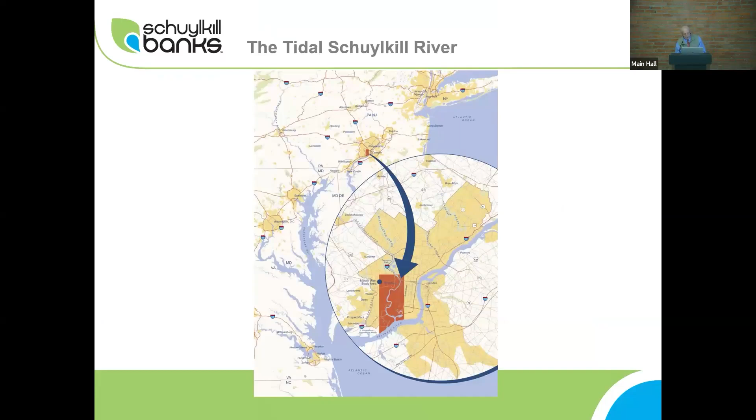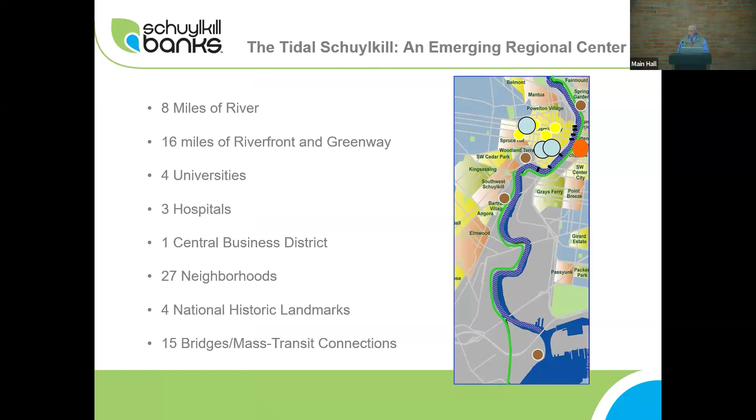Schuylkill Banks is the branding that we've given to the Schuylkill River Trail in the last 8 miles of the river, the tidal part of the Schuylkill River. Some people don't know the Schuylkill River is tidal. There's a 5 or 6 foot variation in tide, and that makes everything we do out there on the river more complicated. This is what the river looked like in 1924.

This thing is moving by itself now, so... I think we have it on a timer. Will you get it back to where I see the next slide coming, the previous slide? Yeah.

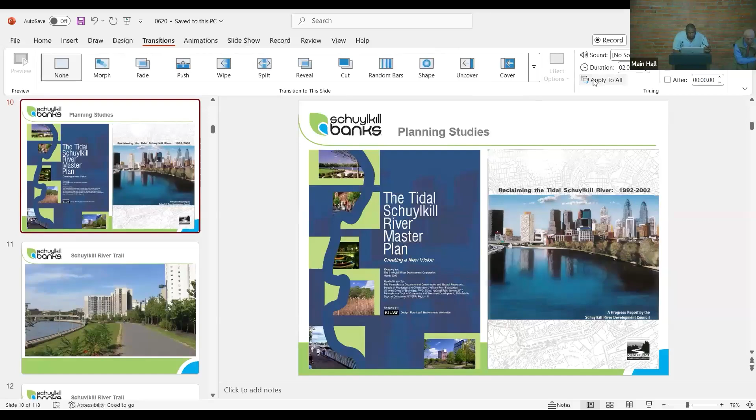Well, the first thing is 90 years passed. So a lot of things can happen in 90 years. But also, the concept of a river trail goes back ages. I've heard at least 10 different stories of where it first started, and they're all probably partly true, but they go back decades and decades.

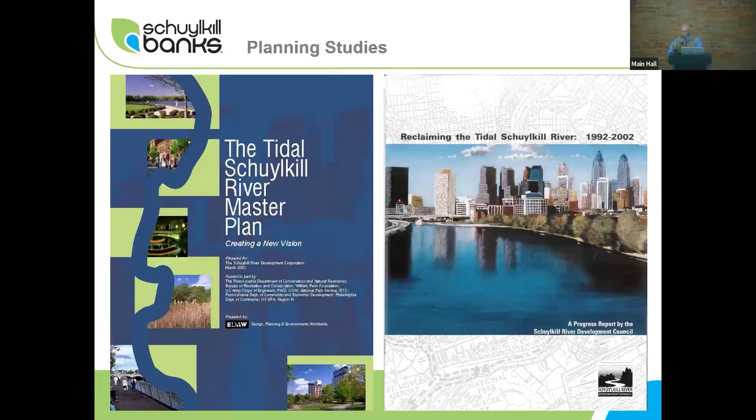At that time, around that time, there were at least 2, maybe more, planning studies initiated. The one on the right there was issued by the Schuylkill River Development Council. The one on the left there was issued in 2003 by the Schuylkill River Development Corporation. So the only thing that changed when they went from the community-based organization to the thing - it's the same organization - they just slightly modified the name, but it's still SRDC.

People use it in the rain. People use it in the snow.

I imagine a lot of people in this group will remember the whole issue of the railroad. When the trail was built, the railroad came and actually sued the city, trying to close off the entrance to the trail at Locust Street and Race Street. And the city, to their credit, said, the heck, we just built a trail. We're not closing it off. It was in federal court.

It was Judge Kaufman. And luckily, the judge, on the very first day, he said, I don't really get what you're saying, railroad. You're bringing this court case, but I drive into work every day and I go over a couple of railroad grade crossings. It's in my car, it's not as unsafe as you're thinking it is. So the railroad got a little nervous that they were going to lose the lawsuit that they had brought. So a compromise was reached.

The 2 crossings, Race and Locust Street, had the gates that you all know there that close automatically. But also as part of that agreement, they would build a pedestrian bridge. Now you would think that would be an easy sell. That was not an easy sell. In fact, we got the job somehow of moving that along. The city was smarter than us there, I guess. And in fact, we got sued by the neighbors to stop this. So in any event, it finally got done.

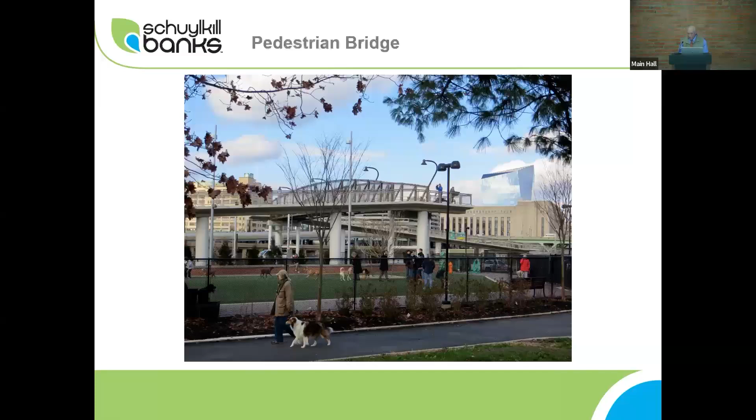And I think everybody is pretty happy with that. The dog park is way better than it was before. The gardens were kept in place. And the bowl area, which some people thought was in jeopardy, hasn't changed at all. If you go downriver further, there's the Schuylkill Banks Boardwalk.

This was done out of necessity. There wasn't enough room on land to build a trail, so at some point somebody said, why don't you build a structure out over the river? You could call it a boardwalk. We were told by knowledgeable people, don't even think about it, you could never afford it and you could never get permitting for it. Last October was the 10th anniversary of the boardwalk, so obviously both those things were not correct.

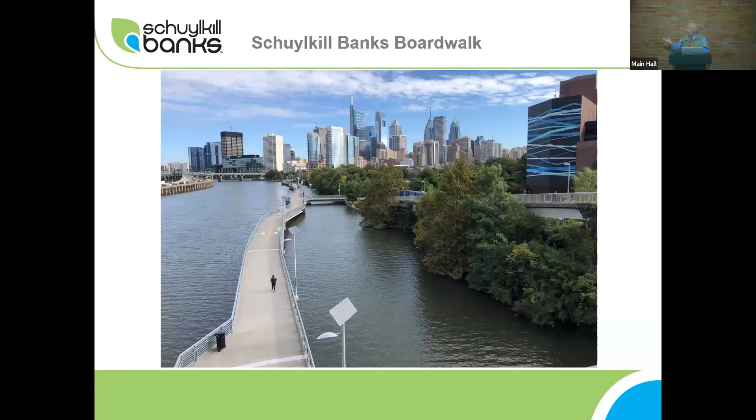This is a picture of the boardwalk from the South Street Bridge. This South Street photo of Center City is now the go-to photograph of the city. It used to be Belmont Plateau, but there's such a great view of the skyline here that it's just great, and lucky for us, the boardwalk just happens to be right in the middle of it.

If you turn around there and go south, there's a section down there called South Street to Christian Street. This is a section of trail that's really nice, it's planted differently, more of a meadow mix. Up until recently, two months ago, we didn't get a huge amount of traffic because it was a dead end right at Christian Street, but it's a very nice section of trail.

I'm going to jump over a section here.

I'm going to go down to the other side of 34th Street, where there's a section of trail called Grays Ferry Crescent. Grays Ferry, because that's the neighborhood you're in. Crescent, because there's a big curve in the river to the left.

This is a really beautiful trail, but it's a neighborhood park. It doesn't go anywhere to the north, and it wasn't connected very well to the south. So the neighbors loved it, but it's supposed to be a trail, it's supposed to be for everybody.

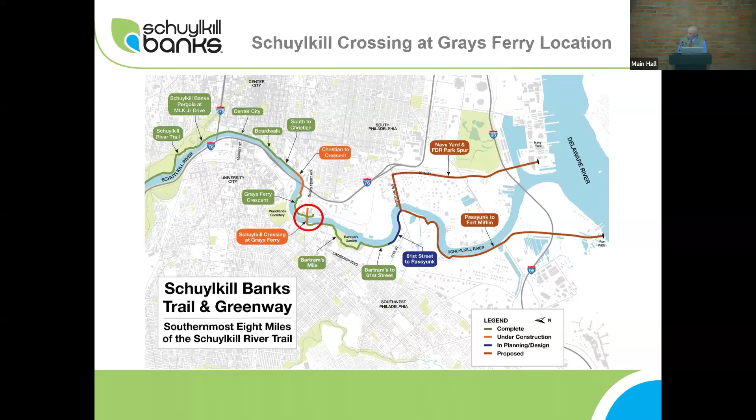With that, we always wanted to cross over the river, because we knew we could not continue down the east side of the river. While this was going on, Sunoco was still operating a refinery down there, and then Philadelphia Energy Solutions took that over. We knew we could never get a trail through a refinery—oil and water really don't mix. So we looked at other ways of doing it, and we wanted to cross around at Grays Ferry Avenue.

If you look at Grays Ferry Avenue there, the first thought was, well, we use the Grays Ferry Avenue Bridge to cross over the river. But if you know that bridge, it's very, very high up in the air. It's not pedestrian friendly, it's certainly not bicycle friendly.

So the new idea, not so new anymore, was to take this old abandoned railroad swing bridge and use it for the trail crossing. Trains stopped running on this sometime in the 1980s, we're not sure when, but here's a picture of the rails, two sets of rails, and you can see a fairly good-sized tree growing up from between them. So obviously it was a long time ago.

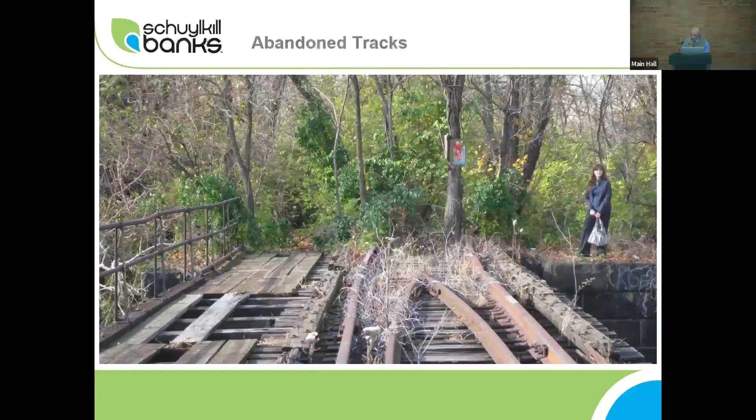It isn't done yet. The contractor walked off the job, there was a dispute with the city, and he was off the job for a long time. But before he left, he got rid of the old truss—the idea was it's too heavy, it's too old, and we're going to put a newer, lighter truss in there, and keep it as a movable bridge.

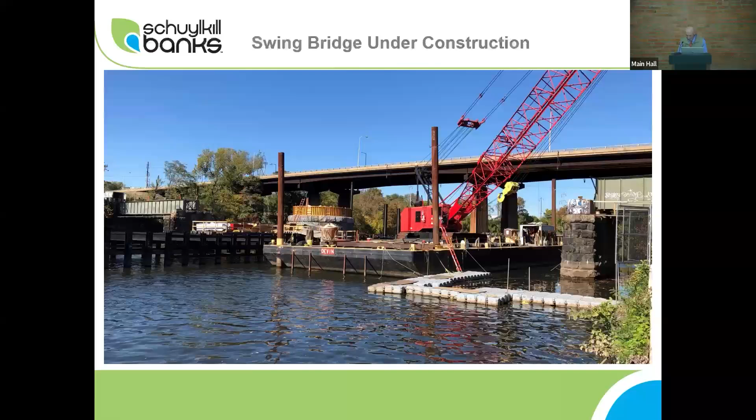So here's what it looked like before the contractor walked off the job, and the city's handling this.

We gave them a really hard thing to deal with, but they've done a wonderful job.

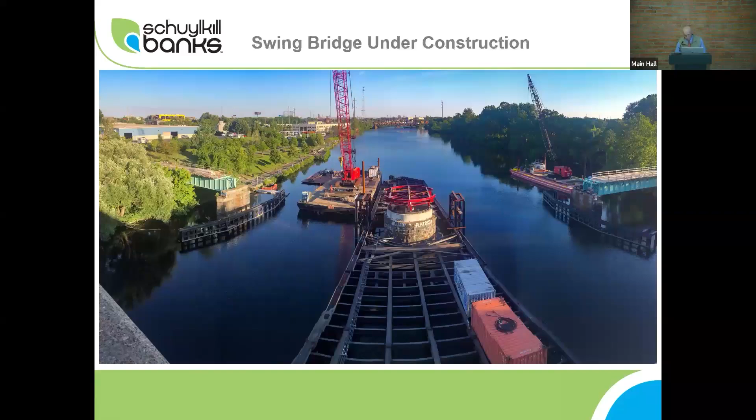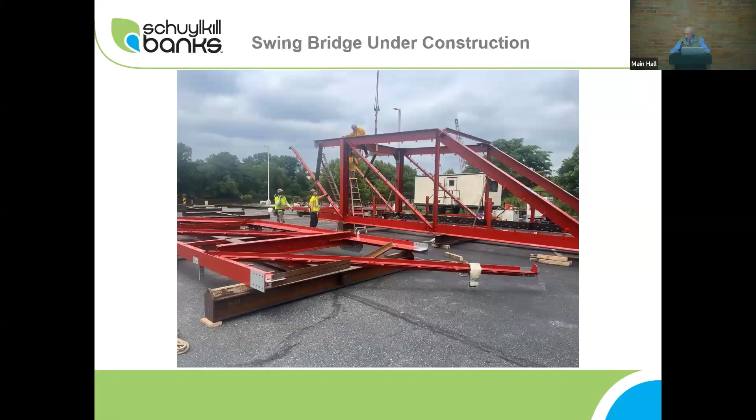The good news is steel started to arrive on site within the last two weeks. Iron workers are out there putting that steel together, and I'm told that next week these sections here will be put on a barge and taken out to the pedestal and erected. If that happens, and if everything else goes well, this will be open by the end of the calendar year. If everything goes well, it will be the first time.

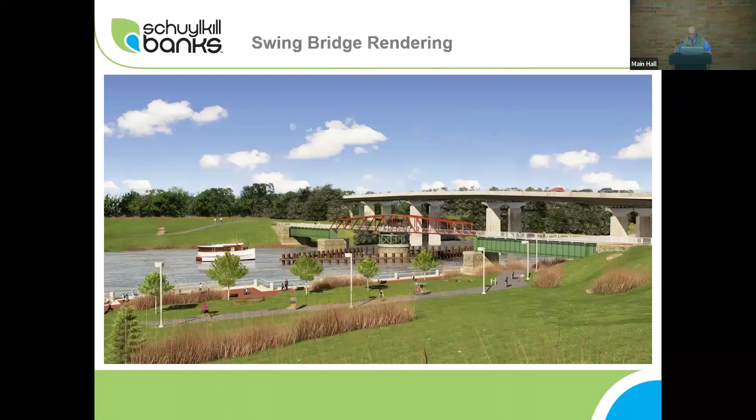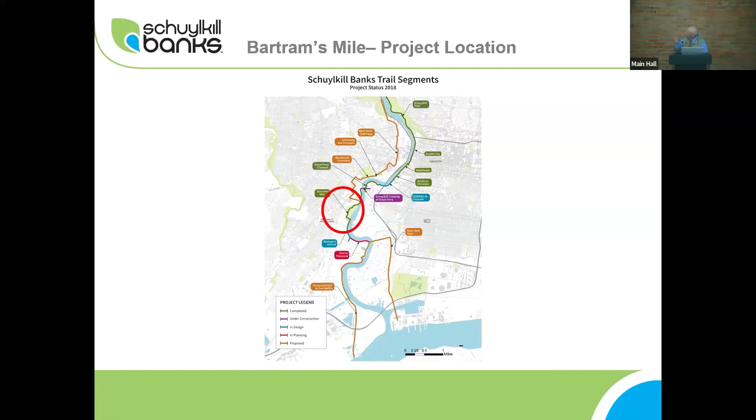Once you cross over the river there, you come to a section of the trail called Bartram's Mile. It's about a mile long, and it goes through Bartram's Garden. This opened in 2017. It's a neighborhood park. It's not connected yet to the north, and not connected very good to the south, but it's a beautiful section of trail. Here, this is what it looks like.

We're trying. Once you get that swing bridge connected, this trail gets a lot more traffic on it.

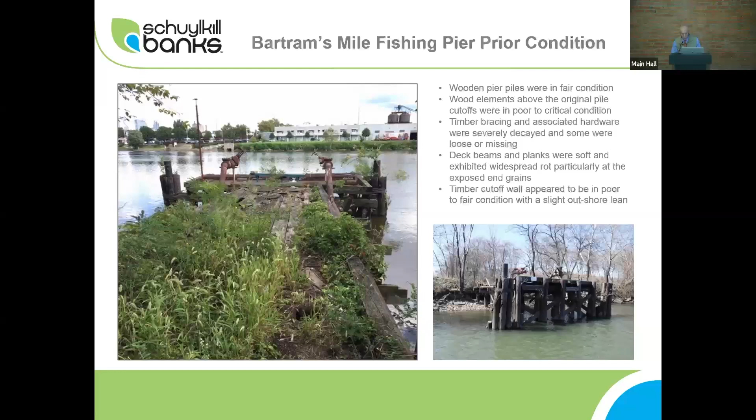Now, if you were to walk down that trail, you'd walk past a bunch of old derelict piers, mostly petroleum piers. They're out in the river, rotting, not being used. Fishermen are going out there on some of them, taking their life in their hands. We've taken a couple of those piers and turned them into a fishing pier. We thought on the one you just saw that we could use certain elements of the foundation in there, but when we got in there, we almost couldn't use anything. It was almost completely rebuilt.

But those piers have something very important: they have a permit. And for some reason, which I do not understand, it is immensely easier to revise or update a permit than it is to come in with a new one. So that permit is really valuable. It establishes the fact that there's something there and you're fixing it. It sort of makes it a maintenance project in a way, although this was way more than maintenance.

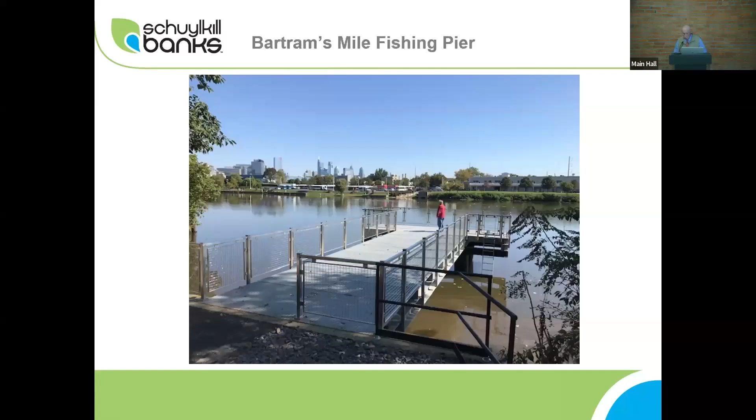So if you go down to the end of the Bartram's Mile, you'd come at one time to 56th Street, this wonderful pergola and plaza with beautiful views of the city. For a while that's where the trail ended, because we're building this trail as land and money become available. So it ended at 56th Street for four years, until we got some money to do something different.

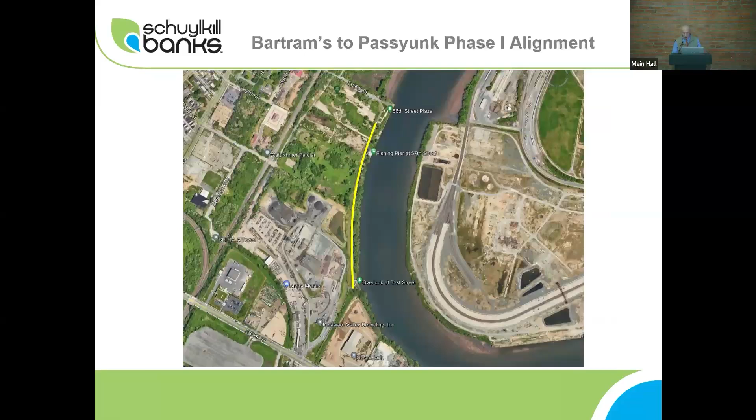That extended it further south. So this is what it looks like going further south. There's a section of trail right along the river. This is old abandoned industrial land, but it wasn't too bad. In fact, at the northern end of this is what it looked like, and you don't need a great imagination to see a trail being built right through there, with the river right on to the right.

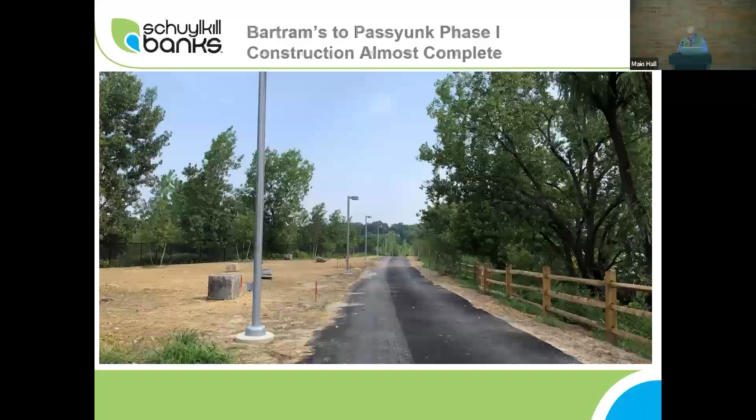When you got further down, it did get a little more gnarly. There was a lot of invasive plants, and a lot of what some people call Philadelphia fill, old rubble buried down there from demolition sites, but still pretty good. So that trail got under construction. Here it is, almost a picture of it almost done.

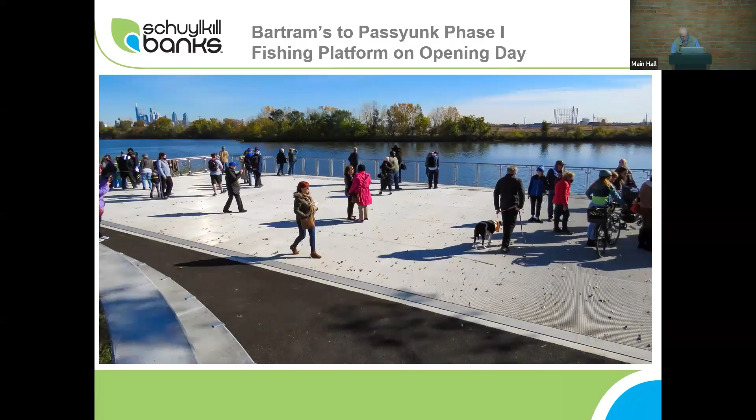Here's a picture of a fishing platform we built there, a million dollars. This fishing is really huge in this area. Now there's a lot of people out there because it's opening day, and just to the right there we're giving out free donuts, so a lot of people there. But if you were to walk south from there, you'd just follow the terrain.

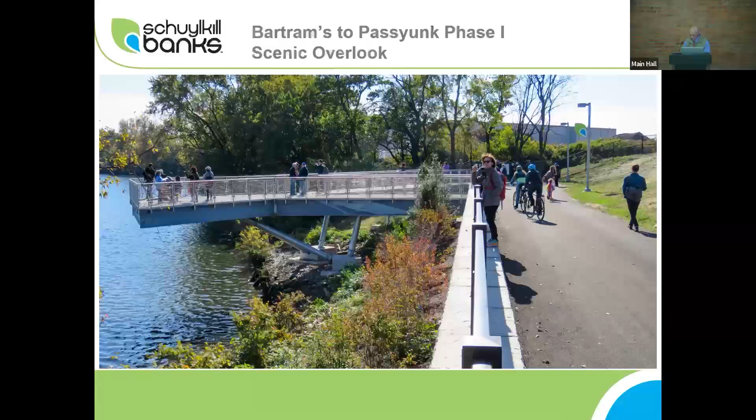It's rolling terrain, and when you get to the end there, you come to this wonderful overlook that we were able to build. Right beyond that, the trail ends there today. This overlook has amazing views of the city skyline, and by the way, almost the whole trail has great views of the skyline. So that was exciting to get that done.

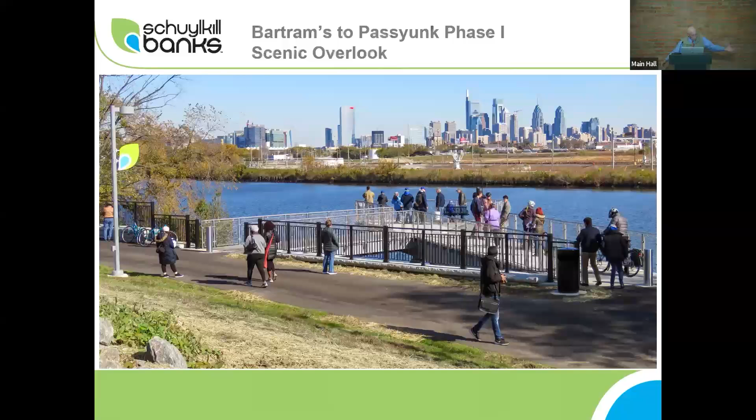But again, it's a neighborhood park. It's not connected to the south, and it's not well connected to the north. So now let's jump back to the section that we skipped over, because that's the star of the show, I think.

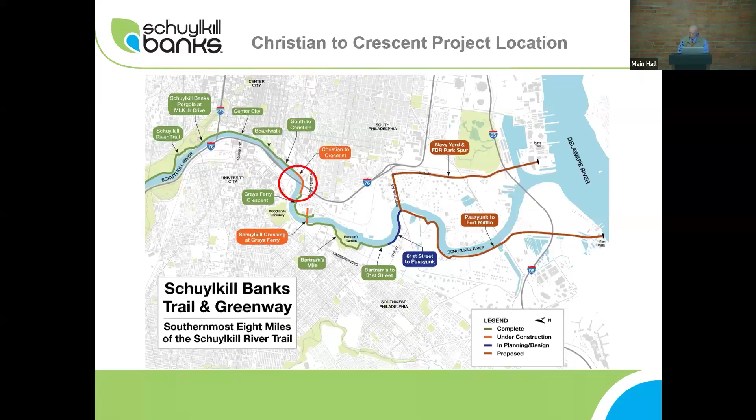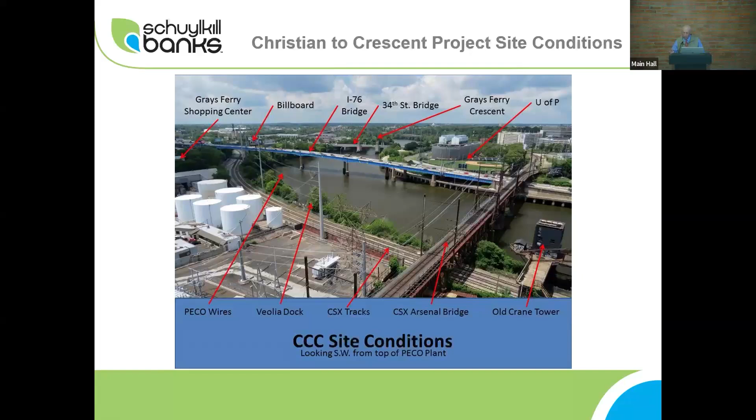If you don't know where this is, and you probably don't because you can't really see this from anywhere, it's right in back of the shopping center on Grays Ferry Avenue, or directly across the river from Penn's baseball field. So again, a lot of complications. How are we going to get a trail through here? We really didn't want to go out over the river if we didn't have to, but maybe we'd have to.

So the question was, okay, we have a lot of structure, but what will that structure look like? We said, well, we know we have the boardwalk — we built the boardwalk, and that's just pre-stressed concrete beams on caissons. Those caissons go down into the riverbed, and they actually go down into the rock. We knew we could build that, so we looked at that.

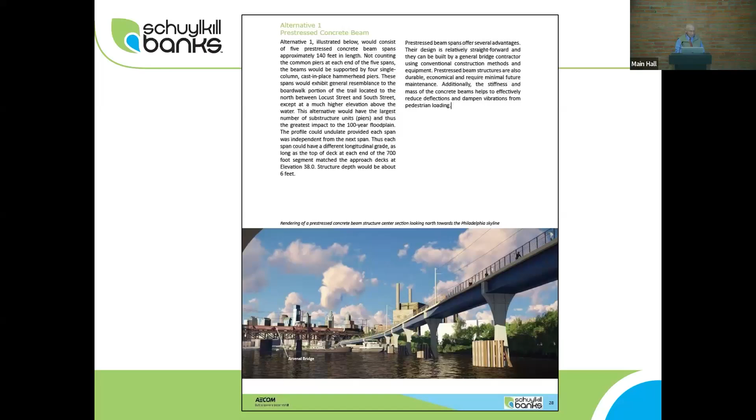But we thought, you know, this thing is high up in the air now because they had to get up over that pier, right? And we thought, well, if we do that, you're going to have these piers every 140 feet, big concrete piers — it's going to look like a concrete forest of piers. It's just not going to look good. It'll work, but it isn't going to look good. Also, it's going to be expensive because these piers are all built on drilled shafts or caissons.

But these would be — because they would be much higher, or maybe they would be — so we looked at a steel girder. That lets you do a longer span, and therefore you have fewer columns, but you still had a lot of columns. So we said, we're not crazy about that either.

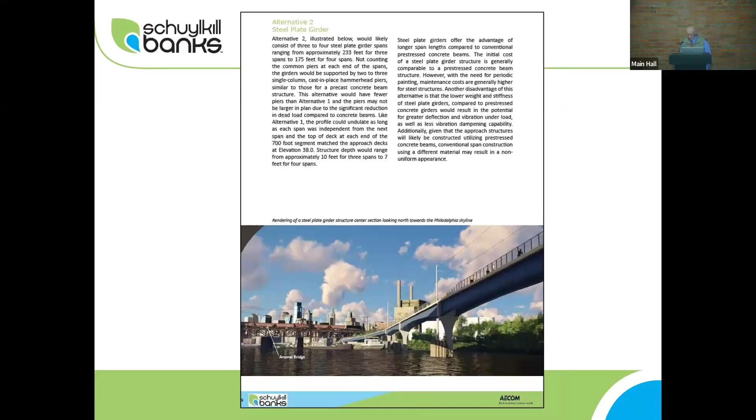And for a bunch of reasons, that got deferred. We're actually starting to relook at that again. And we thought, is there something we can do on this flat part of the land, of the structure here, that would make sense? And we thought, well, how do you figure that out?

So when we looked at those things, we looked at cost, we looked at appearances, we looked at how many penetrations they were going to make into the water, because the more penetrations you make into the water, the more difficult the permitting becomes. Also, it's expensive. So the suspension bridge just sort of eliminated itself. It's not long enough for a suspension bridge. But the other three would work.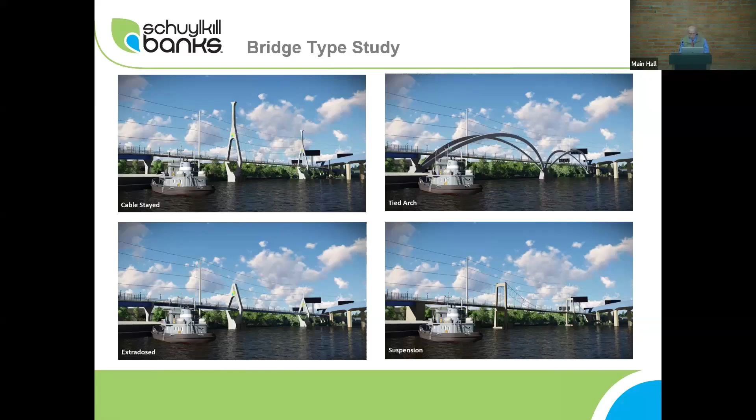But when the committee that was looking at that looked at that, nobody really liked the tied arch. I don't know why, they didn't like the tied arch. But they did like the cable stayed bridge, and they did like the extradosed bridge. But there's a lot of different ways you can configure a cable stayed bridge. So we need another study.

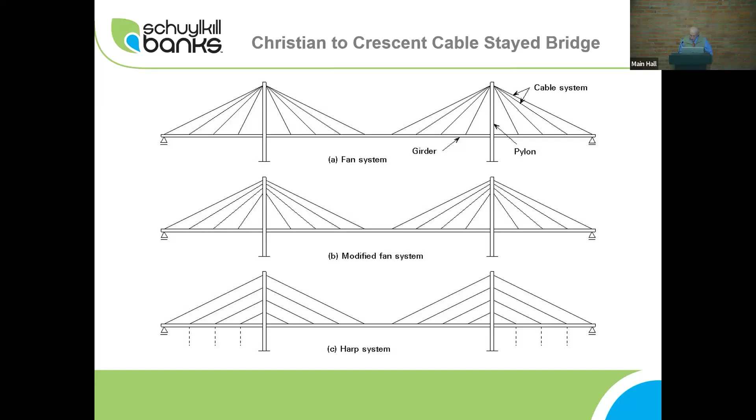You can also have these cables come down in two planes where they attach to the outside of the deck, or you can have them come down in a center plane where they connect in the middle of the deck. Now, when you do that, you don't have as good rigidity as you do with the double plane. So in order to do that, you've got to beef up the deck, make it a little beefier so it adds to that stability.

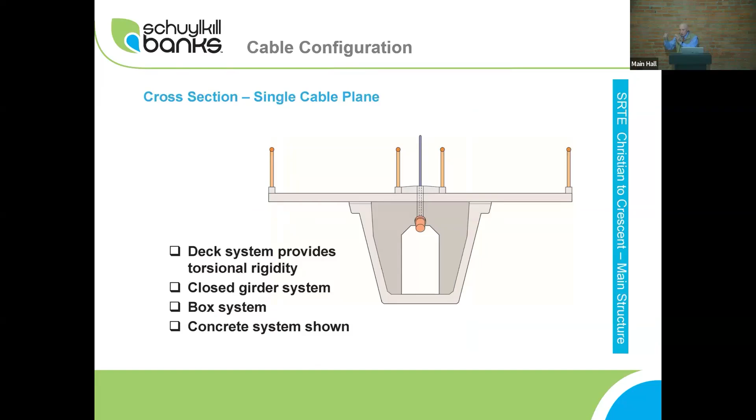When you do the single plane, you see where the cable's coming down there in the middle, sort of bluish. That sort of automatically defines 2 lanes of travel. You have a southbound lane and a northbound lane, or a lane for bicycles and a lane for pedestrians, but it automatically separates those 2 things. People like that, so we ended up picking that one.

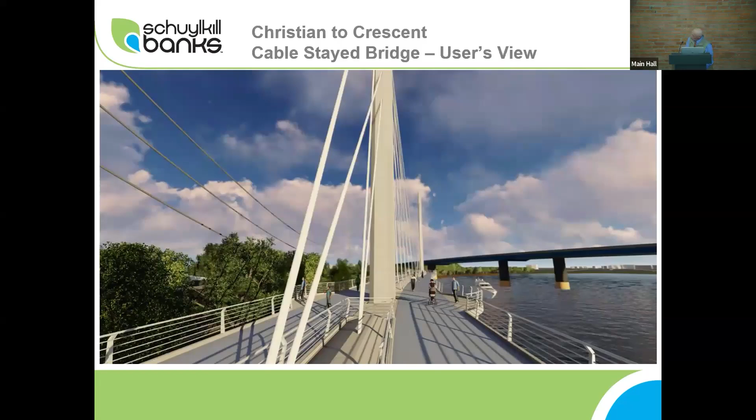And then we took that into a little more refined design. This is what the rendering looked like, and this is how it would look in use. It also could be architecturally lit at night, with accent lighting. So we liked that, and it went out to bid.

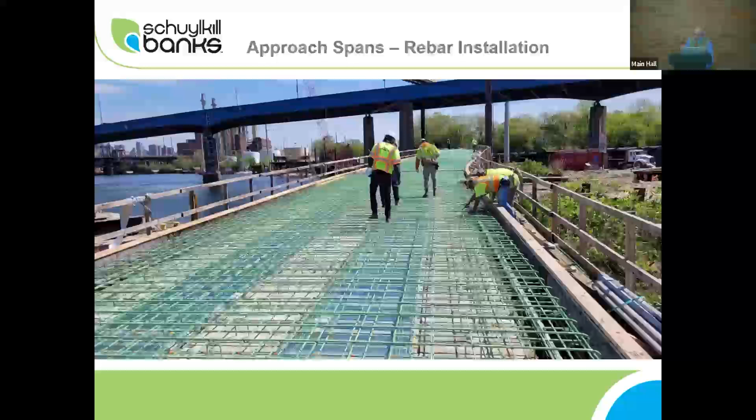This is the approach work. It's just a single caisson, pier cap, pre-stressed concrete beams. This is the reinforcing steel, and this is epoxy coated steel.

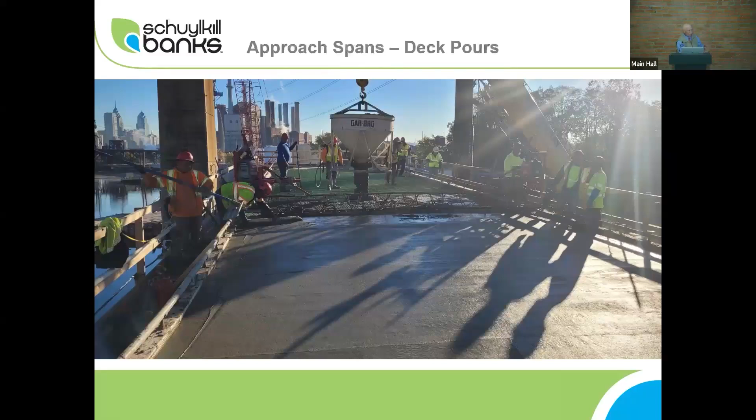All of the concrete had to be brought on barges on these hoppers. They would take a truck downriver, fill up 2 of these hoppers, and then move as fast as they could because they didn't want it to set up in the hopper, and then dump the thing. It was really hard to do, and it took a lot of people. Everybody needed for this had to be out on site.

This is how that approach ended up. And I want to point out the very fancy railings here. This is stainless steel 316.

When one of the estimators was looking at that at the beginning, he said, ooh, the good stuff. We're doing that because we're in a marine environment, but the city's going to own the trail. And the city said to us, please don't build us something so fancy that we can never maintain it, because you're not doing us any favors.

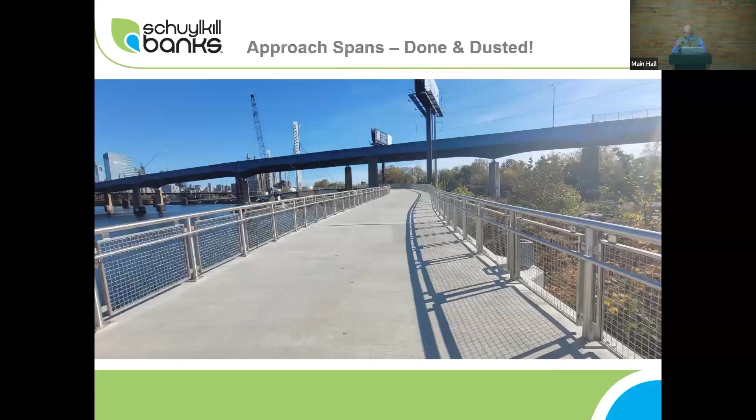And we said, look, we've got to be out over the river, we've got to have certain kinds of things, but we'll do everything possible to make the maintenance of this as good as possible. If we can get everything to last 75 years, would you be good? And everybody said, yeah, that would be good.

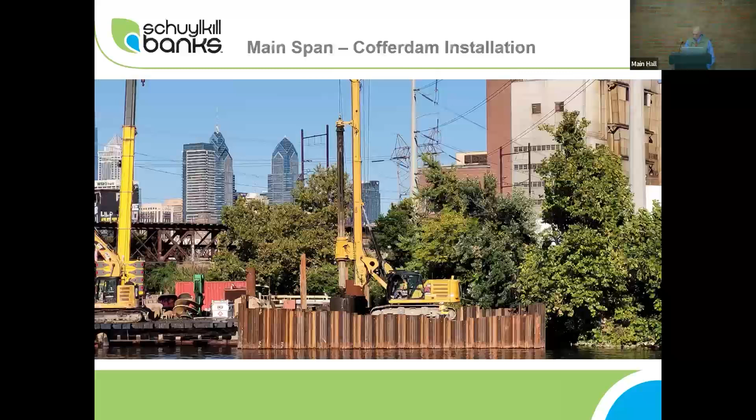So here's the construction starting on the pylons. These are the caissons going on, a cofferdam being put around them to pump out all the water. Here's the caissons under construction. There's 9 of them for each tower. Here's the reinforcing steel, look at how much steel there is. You wonder how they can get the concrete in there, don't you?

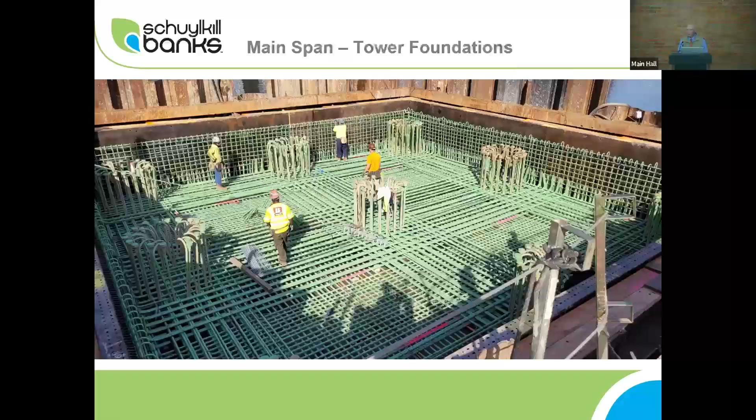You look around at how many people are working on this thing. They're finishing this up here. Here's the tower starting to go up, and here's the tower getting further up.

The picture on the right, if you look at that, there's some piping in here. This is plastic piping that they can pump either hot water or cold water through. So if it's summertime and you want to keep the heat of hydration down, you can pump cold water in there. And if you're doing cold weather concreting, you could put hot water in there, and it changes the temperature.

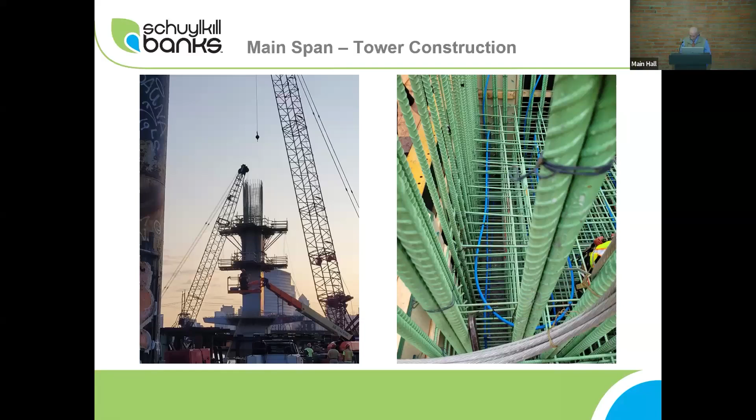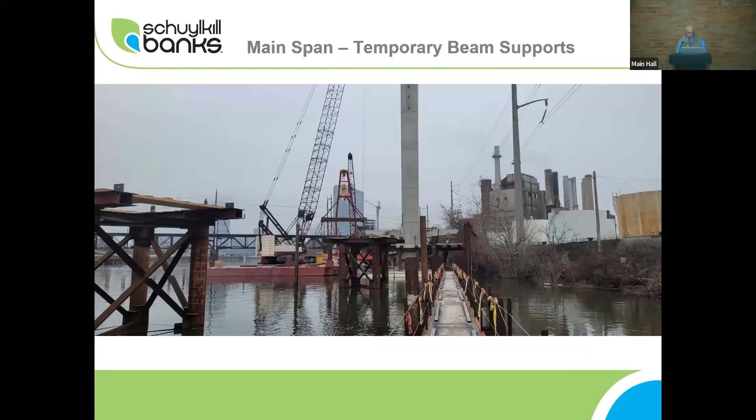So, kind of complicated. Here's the attachments going up, the cable attachments. When you bring these beams in, you've got to set them somewhere, and you don't attach the cables right away. So you had to put these temporary structures in there, which is what that rusty colored steel is, as a support for these beams.

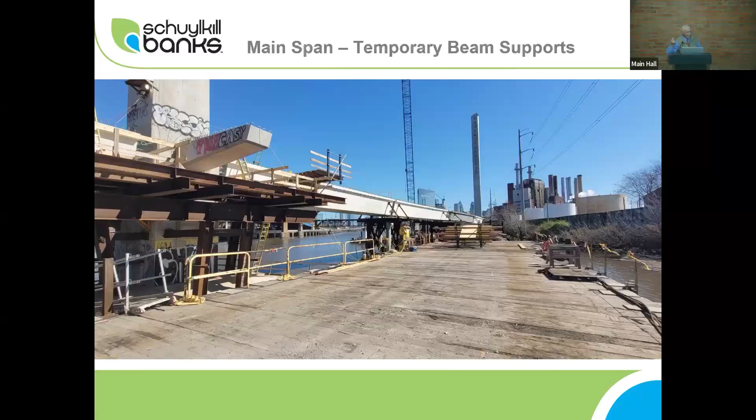This photo is a little bit out of sequence because the beams were already up, but I wanted to show you that the contractor built himself this boardwalk so that everything he did didn't have to be done from the water. He was able to get heavy equipment out on there. I think this idea is what got him the job.

So here come the beams. These are big, heavy beams, 135 tons. They were manufactured up in a plant in Albany. They were brought down the Hudson River, down along the Jersey coast, up Delaware Bay, Delaware River, and the Schuylkill River.

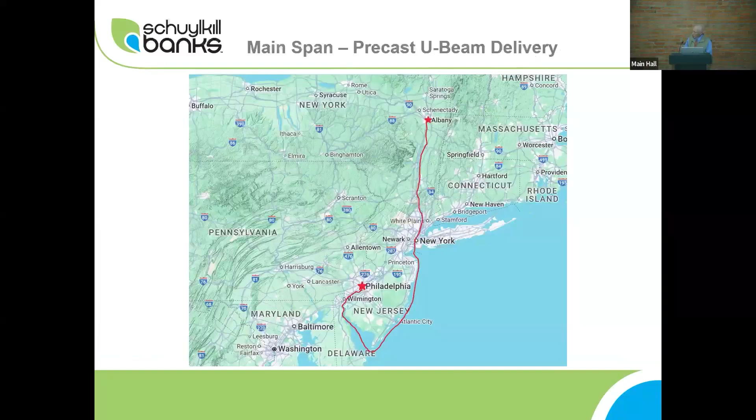We were told you got to be really careful, these are very, very heavy beams. If you have a crane on a barge and they make a mistake, it could fall over. The crane could be in the river, the beam could be in the river. You got yourself a mess.

People tried to talk us into going to steel instead of concrete. That would have been lighter. But we said no, we're trying to make it less maintenance for the city, and concrete is less maintenance than steel.

We were getting some comments from a peer review consultant whose job was to look at what you got and make comments. He was saying, I think you're making a mistake. There's only 5 cranes in the country that can do this, and they're all over the country, you'll never get one. So we said, well, we're doing it.

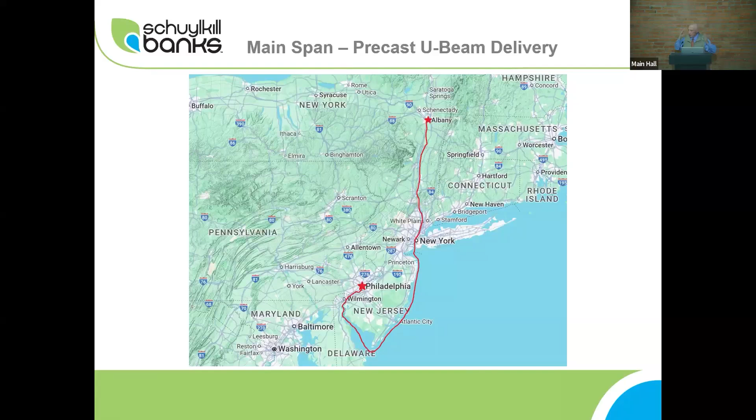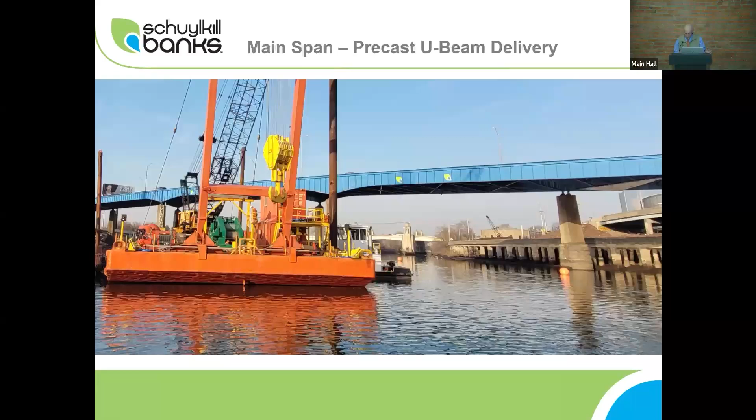We said, I think you sent the wrong piece of equipment here. Well, it wasn't the wrong piece of equipment, it was exactly the right piece of equipment. It picked these things up, and we watched it go over there and plop it on. The first beam was 27 minutes, which is pretty darn fast, and he got faster as he went on. As he did them, he got more comfortable with doing it.

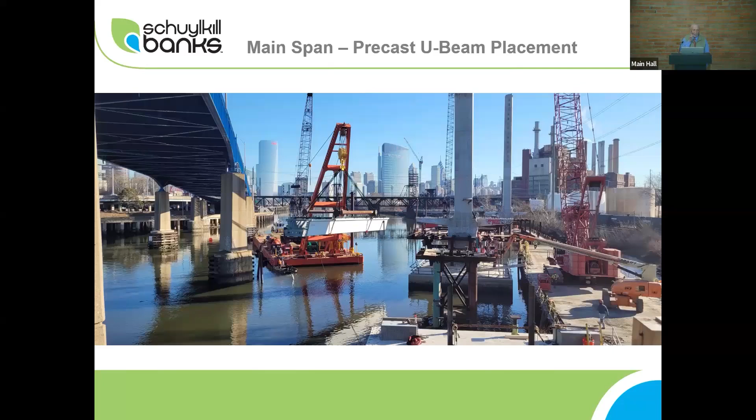So again, the contractor went and found the right piece of equipment. He had to go to the Bahamas to get it. Probably cost him a fortune, but he had it there. So here it is, lifting these things in.

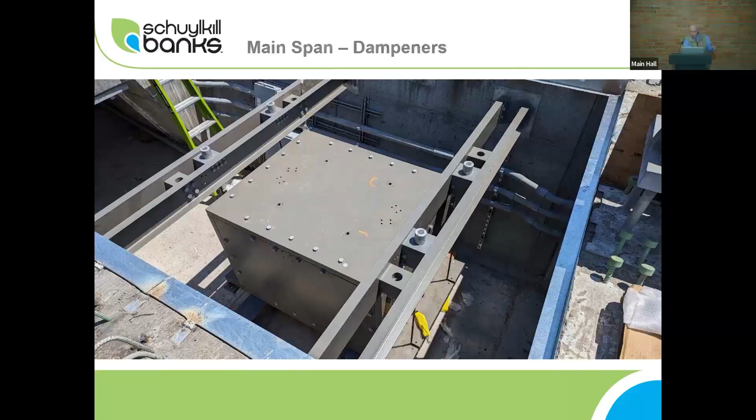When you have these kind of structures, you can get some movement in there. That's okay, that's normal. But we decided to spend some extra money and put these dampers in there. These dampers sort of counteract any movement — if the structure wants to swing to the left, somehow this pushes it back to the right.

So we actually said, look, how about we bid it as an alternate? We'll design it this way, but the contractor can bid it using epoxy. PennDOT said that's fine, because they were absolutely sure everybody would bid it as epoxy coated, which would be less money. There were 8 bidders, 7 bid epoxy, but the low bidder bid stainless steel. And that's the only bid that counts, so we've got the stainless steel thing there.

Oh, I'm stuck again, guys. Eli, I don't know what you did last time, but show me now. I think you had to right click and then pop that up. Okay.

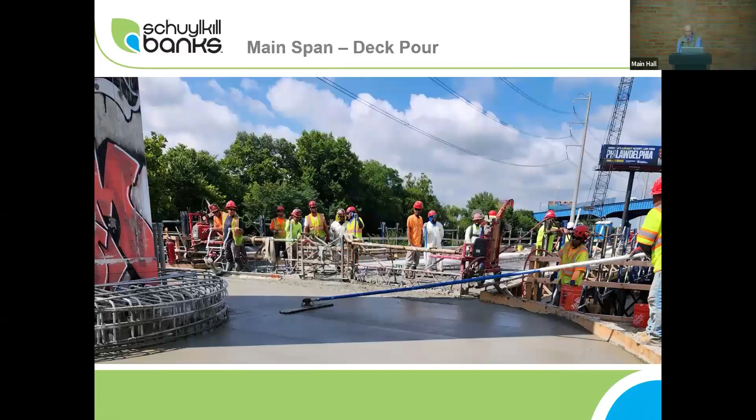So here they are finishing some concrete. Again, you see how many people are out there — they're all brought out by barge. They have everybody they're going to need for this operation has to be out there. They can't say, hey, where's Louis? Louis on land — Louis has got to be out on the site.

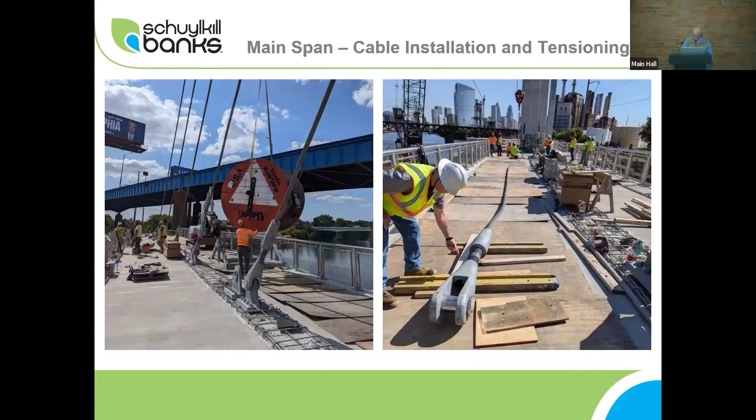Here they are starting to put the cables up. They attach the cables at the bottom, they attach the cables at the top, and then they tension those cables. As they tension them, it lifts the structure up about an inch off of those temporary supports, which are on jacks, and then they can pull those supports out.

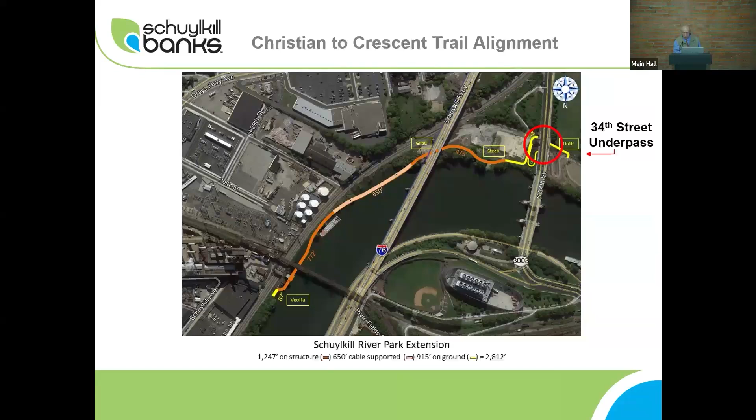This is what it looked like underneath. PennDOT had a plan to remove this bridge, fill it in, and get rid of it to make it just a regular roadway section.

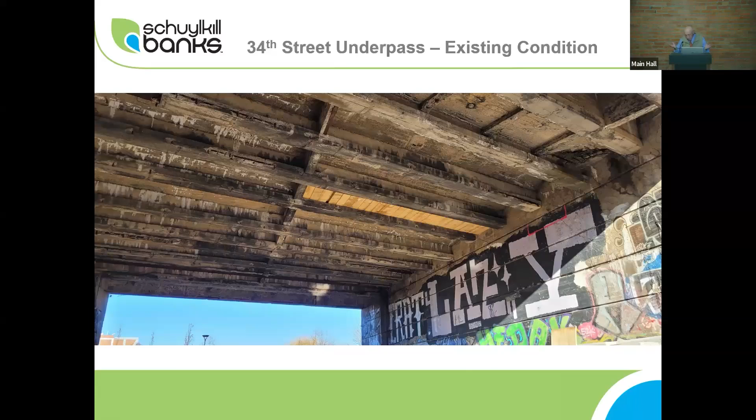We went to PennDOT. I had to cry in public, but I asked them if they would please keep it open. PennDOT said, look, we can do better than keeping it open for you. We can actually reconstruct it.

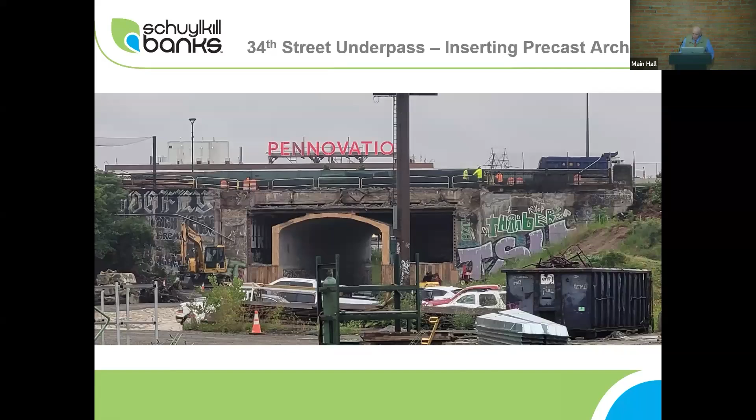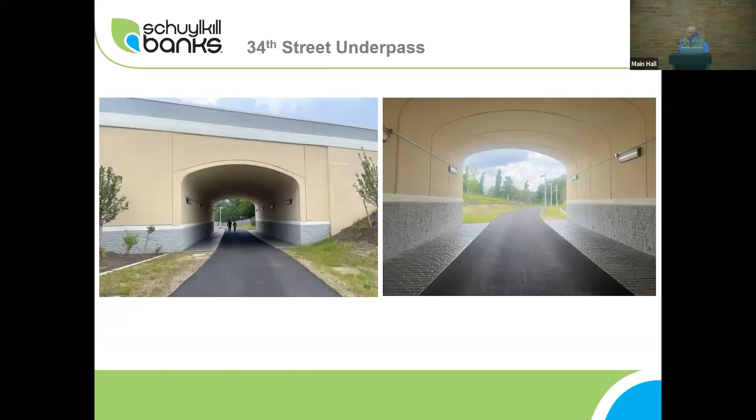So as part of the big project, but at PennDOT's cost, they took these arches you see there, two sections, and slid one in from each side. Once they did that, they demolished the bridge up top and around it. The graffiti people found out where this was happening, by the way. But this is what this thing looks like today, looking in the two directions. That was super, super fortunate and super, super great by PennDOT.

Here's a rendering of what this bridge looks like, but you know what? We don't need to show you a rendering anymore because we can show you the actual photographs. So as all of you probably know, yeah.

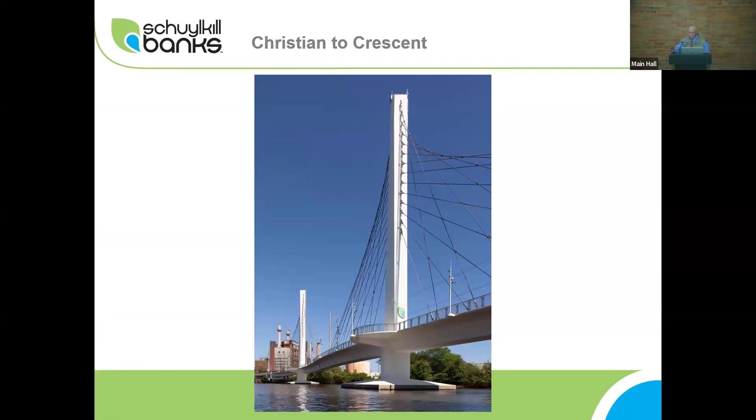May 17th, great day. We have some great photographs. What we always do is have a lot of donors to our organization, so a couple of days before the opening, we give our donors a chance to come and walk on the bridge, sort of get a sneak peek.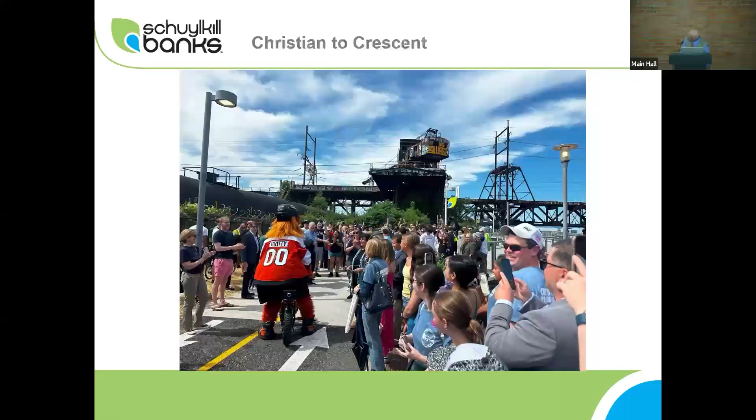This is opening day, the ribbon cutting. We get out there and realize our insurance company said, look, you're doing something dangerous, you've got these big scissors there, we really don't want you to do this. We want you to have somebody, a safety officer, overseeing the thing. So we got one. Here he comes. So he oversaw the cutting.

Everything went great, and he sort of led everybody over the bridge. And everybody followed. It was a great day.

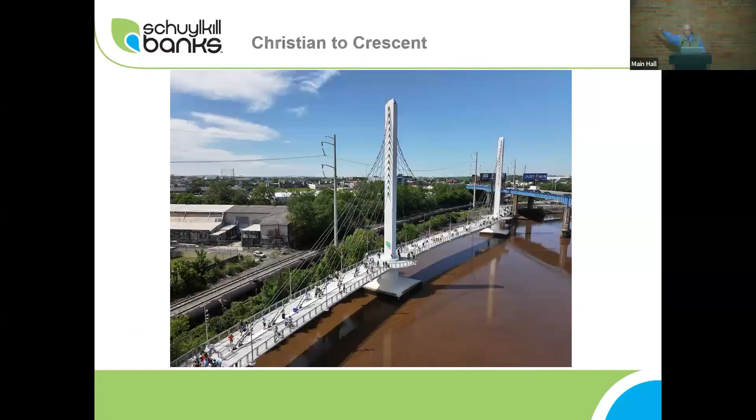So the bridge looks really good. It's got an immense number of people down on the lower end of the trail on the Grays Ferry Crescent. Remember, that was a neighborhood park. Well, now there's a whole lot of people coming from the north down there, and I'm sure there's just as many people coming from the south going north.

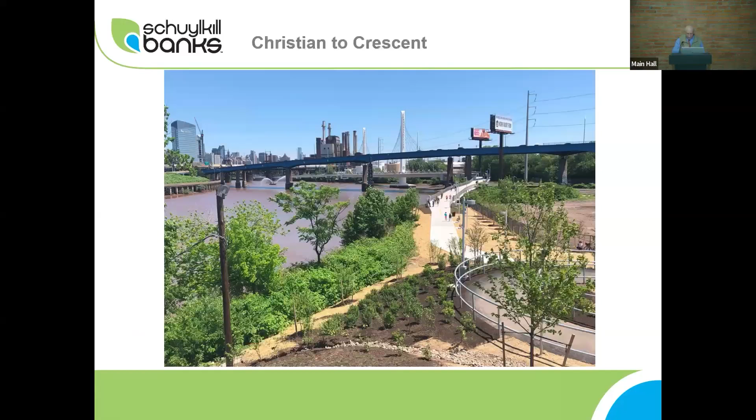It's open. I was down there this morning, people are using it. John Randolph said he was down there this morning, people are using it. So now I just want to tell you about the last project.

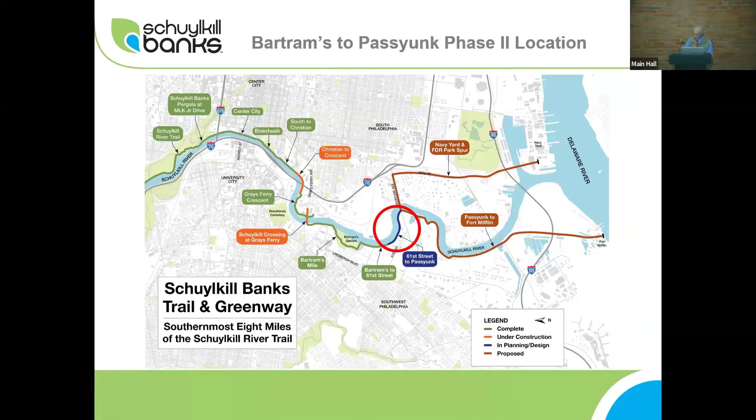I know I'm going a little long, but this is exciting. So we want to go down and extend the trail southward from where the overlook is. On this slide, we built what's in yellow, but it's a dead end. We want to take that to Passyunk Avenue.

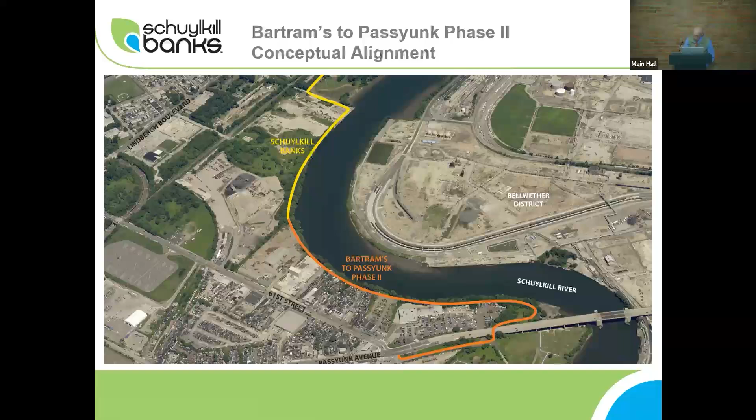Because when it's a dead end trail, it's just a recreational trail. You run or bike out, you hit the fence, you turn around and come back. If you can get to Passyunk Avenue, you can get to South Philly or Southwest Philadelphia. So all we're trying to do is build a trail along the river.

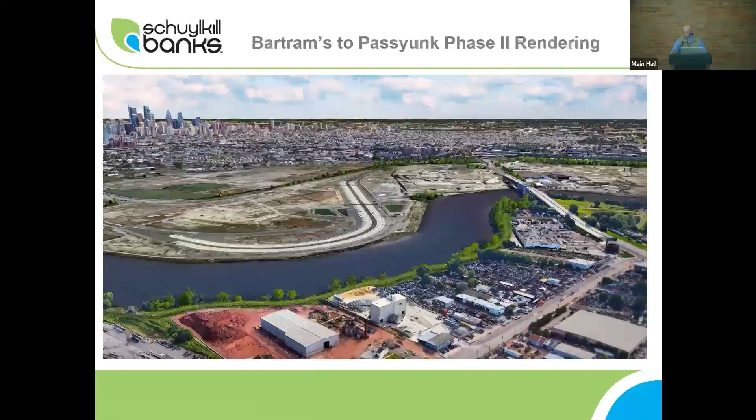It's all active industry there, and it's not the most pleasant industry. There's a soil remediation plant, a concrete plant, a whole bunch of junk car operations, some car repair, and Jerry's Corner, if some of you might know what that is — it's sort of a funny flea market.

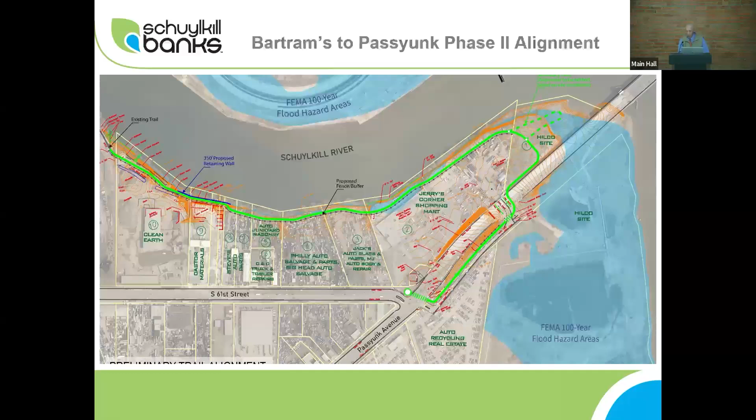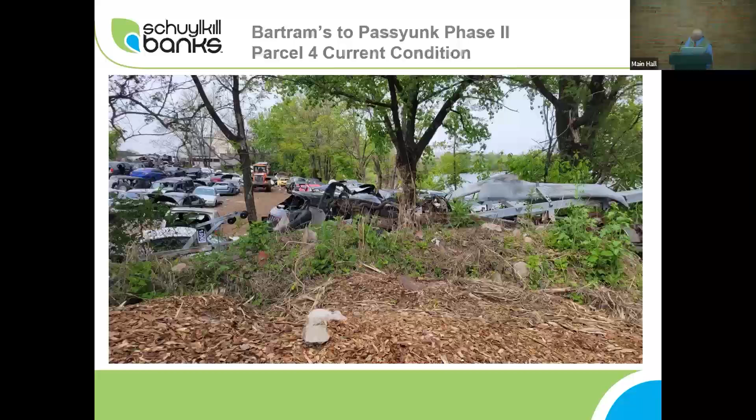That green line is the trail going under there. It goes to the Hilco property. This is what it looks like if you stood on that overlook and looked down — it looks like a green ribbon down there. It looks good, but it's not so good. All these junk cars are there, and some of them are falling down the hill, almost into the river.

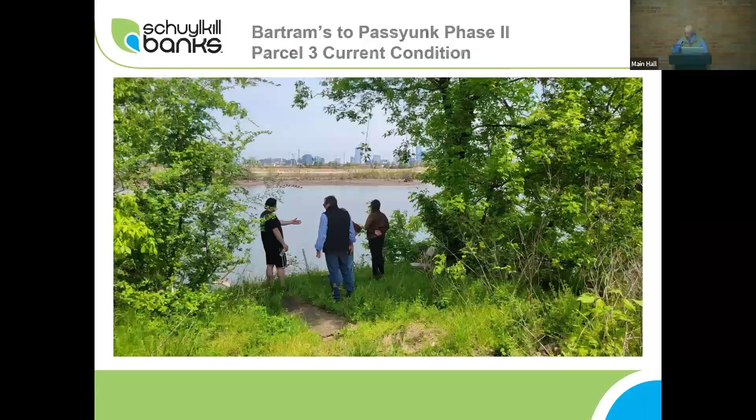He says, you build a trail here, I'll lose my fishing spot. And we said, no, you'll just have to share your fishing spot with a whole bunch of other people. But look at the view out there. And if you sneak out a little bit, you get tremendous views of the city skyline.

And then you get to the end, which is the Hilco property. This is what it looks like today. This is, we think, not that polluted. Neither Sunoco or Philadelphia Energy Solutions really developed this part of the land. We need to do some testing. Hilco's been a little bit of a pain in the neck with regard to that, but keep your fingers crossed that we can get down there.

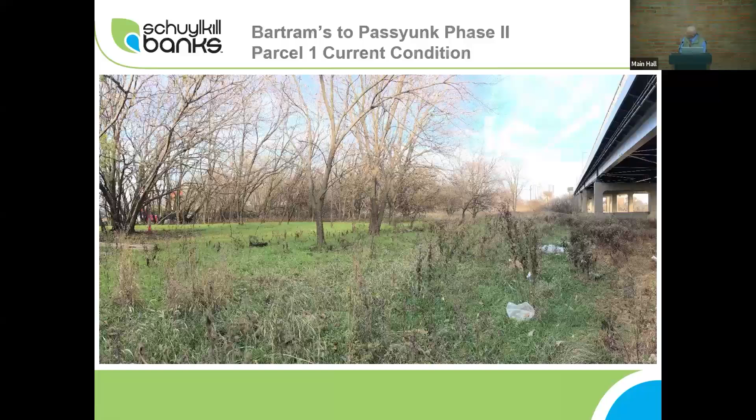And everything I've talked to you about so far is capital projects, because this is the design advocacy group, and I think capital projects is mostly what you're looking at.

But our organization does a lot of maintaining of Schuylkill Banks. We do almost all of it. We have a couple volunteers in the group here who are part of that group. We have one maintenance man for 4 miles of trail, but he has a lot of volunteers who are very faithful and very talented.

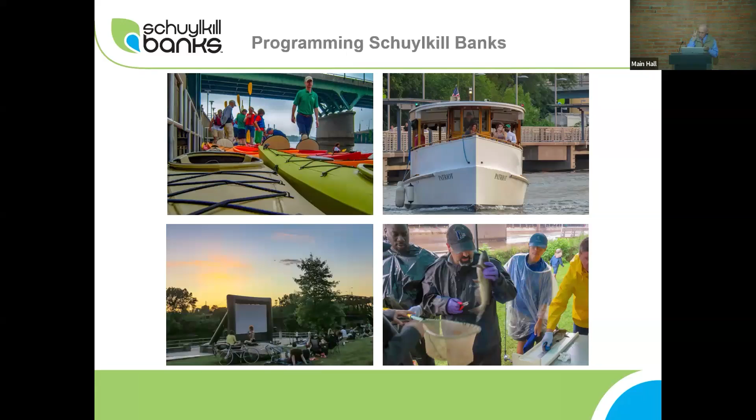And then, of course, we have our programming. We have kayak tours, riverboat tours, movie nights. Tomorrow's another movie night. We've had 3 of them scheduled so far this year. 2 have been rained out, so we're hoping for no rain tomorrow. And then that last picture is Fish Fest. And then I think that's it. So thank you.